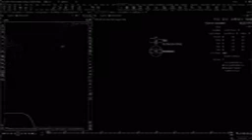So the first thing that we want to do is to examine the mesh structure. And you see, this is a typical output of the Marching Cubes algorithm. And as 3D Coat is a voxel sculpture, this is what is to be expected. But we cannot work with that, because the dual graph of this mesh here will just be a mess. So how can we transform this surface into something that resembles, at least visually, a Delaunay triangulation?

Well, we have this very nice remesh node inside of Houdini. Let's append this remesh node and let's wait a second to generate the output. Remeshing is quite a time-consuming operation, and you see this is already a lot better. But still, the triangles are not looking very even, and some of them are very thin, so this is not optimal. We can enhance the output if we just up the iterations.

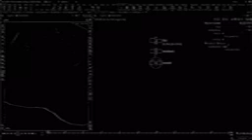So let's say, do 5 iterations for us. If we do that, the mesh quality that is created by the remesh node will be a lot better. But at the same time, the triangles will get a lot bigger. So let's decrease the target edge length to something like 0.05 and wait again.

And now this is something that looks workable. You see that the triangles pretty much are equally sized, and the inner angles of the triangles are pretty similar, which gives pretty triangles. So let's work with something like this. Although it's a good thing to have equally sized triangles, I want different triangle sizes for aesthetical reasons.

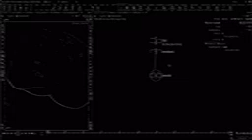So the good thing is that the remesh node has 2 operation modes, fixed length and adaptive. And what adaptive allows you to do is to set an attribute to define the output size of the triangles. And you have to set this attribute before the remesh, of course, on the old mesh. So let's do that. Let's append a VOP, a point VOP. And in here we want to use noise to create an attribute.

So it's the old procedure. Put down an anti-alias noise. You know by now that I prefer that one due to execution speed. And then immediately after that, append a fit range, because you have to fit the output of the anti-alias noise, minus 0.5 to 0.5, to 0 to 1, to transform it into a workable range.

Now that we have that, we can use our good old ramp parameter to remap the noise, like so, and it will be a float ramp because this is a float parameter. And then a second fit node, fit range, because the values that come out here are in the range of 0 to 1, and we want to set them to the destination values that we want to use to drive the final polygon size. So promote dest min and dest max, and let's create a bind export.

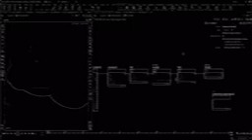And by looking into the help card of the remesh node, you can find out that the attribute to drive the polygon size is called target mesh size, like so. To visualize what we are doing, for now, just connect this to Cd, and you see that you see nothing, and that is due to the fact, as always, that this ramp defaults to 0.

So if we go up here with that, and then move these knobs closer together, we create some sort of noise. Maybe let's dive inside again and promote the frequency parameter of the noise to have more control over the look of it. Maybe something like this. So this is 1 and this is 0. But on the remesh node we use the value of 0.05, so chances are that we want to use something along these lines for the output of our attribute.

So let's try 0.1 and 0.5, like so. And go to the remesh node. Again, it takes some time to generate the output. But you see nothing has changed, and that is because we did not switch to adaptive yet. As soon as I do that, it's now taking this attribute into account. But at the moment you see not much, and that is because the values are not set correctly. You have to fiddle with the values a little bit to find something that works.

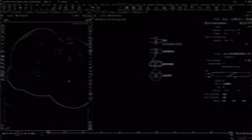So let's go a lot smaller on this one and see if that helps. Oh, and it does. Look at this. Now you have large triangles in the areas where the value is high, and small triangles in the areas where the value is small. Let me get rid of this color visualization, because then we can see the result better. Oh, okay, this is nice. But for my taste, the small triangles are too small and the big ones are too big. So what about changing the values again?

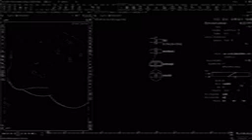Before I do that, I go to this drop-down menu here and go to manual update, because I want to change both values at the same time and I don't want to wait for the remesh node to update. So let's go to 5 here and to 0.2 on this one, and then set this to auto update again. And this already looks a lot more like it. Maybe let's go even smaller with this value. Yeah, that is nice. I like that. Now we have a lot of triangles, and some of them are big and some of them are small. Looks visually more interesting than having all triangles the same size.

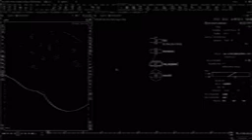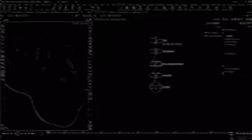Before we move on to the next step, call this set target mesh size, such that you can remember what this did if you open the setup in a year or so. So now for the magic. The good thing is that Houdini comes with an operator built-in that creates a dual graph for you, and that is the divide SOP. So append a divide SOP. And this divide SOP does not do much. Normally it's used to divide the geometry up, but down here you find this checkbox that states compute dual, and if you check that, boom, you have this nice Voronoi honeycomb structure. And I think this in its own right is looking very, very nice.

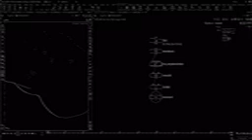But we want to go further. We want to break the surface, but not everywhere. We want to extrude it, but we want to create breaks that form interesting structures. And I decided to use the curvature to drive these breaks. So let's measure some curvature. For this we use a measure SOP. And this SOP analyzes the mesh and creates attributes that store information about the mesh. And one of these attributes is curvature. So as soon as I create this, I get on the geometry spreadsheet a new attribute called curvature.

And this curvature, it lies in the range between 0 and 1000. And it's a good thing that it is spread like this, because curvature is a tricky beast, and this guarantees enough resolution for the curvature.

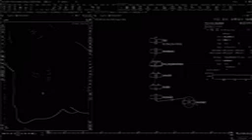To see what we created, let's append a visualize quickly, and let's say, please visualize curvature, attribute, ramped attribute, and if you go to infrared, now you see that it computes the curvature. And it does so on the points. And that is not too useful to us, because we want to split the edges apart where the curvature is over a certain threshold.

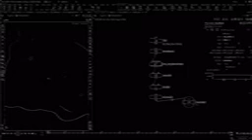So what we want to do is areas where the curvature is low should stay together when we extrude the thing, and areas with high curvature should break apart. So we need curvature, but we need it on the primitives. Nothing easier than that. Just promote the attribute. With attribute promote, let's call this curvature to prims, like so. So the attribute we want to promote is curvature, and we want to move it from points to primitives with the method average.

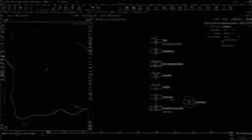And if we now append this visualize here and switch it to primitive, we see that we now have faces that are filled with one solid color, because this color is the average of the curvature of the underlying points, or of the points that make up the primitives.

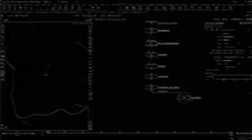A lot better. Now we can say, please Houdini, look at the edges. If the curvature varies more than a certain threshold along this edge, then break the edge. And we can achieve this with a node called vertex split. Vertex split examines a vertex attribute, and if the attribute varies more than this tolerance here, it splits the vertices apart. Very handy. But it cannot work with primitive attributes. It needs vertex attributes. So another attribute promote is needed.

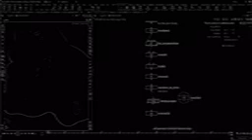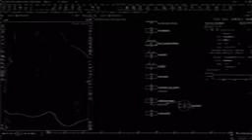Attribute promote. And from here, we promote the information down to the vertices. So from primitive to vertices, and the attribute is curvature. And let's visualize the result of this again by using vertex here. And you see nothing has changed, because if I turn on vertices, you see that every primitive has unique vertices for every point, and it just passes on the value it had before as a primitive attribute to all its vertices. So visually, nothing has changed.

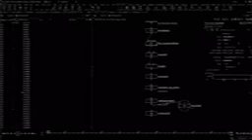Technically, a lot has changed, because the attribute now is on the vertices. Here we have the curvature. And that means that we can now use vertex split. So let's do that. Let's append vertex split here, make it active, and the attribute we want to use to split by is curvature. And you see, if I turn off wireframe, everything got split immediately.

That's because the tolerance is very low, and if I go higher with a tolerance, maybe above 1, you see these front breaks, these are the edges that are split by vertex split, where it just uniques the points. Very cool. Maybe stay at 2.1 for now.

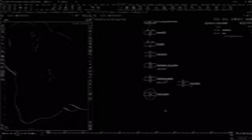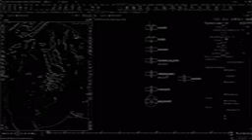So now, the last step is to extrude this. So append a polyextrude, and just extrude everything outwards along the normal. Just a very tiny little bit, like so. Yeah, 0.02 will do for now. And you see, the vertex split created very intricate patterns here due to this threshold.

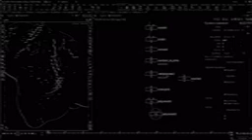Now let's append a second polyextrude. And this time I only want to extrude the areas that got already extruded, because I plan to throw everything into a subdivision surface, and to have the caps very sharp, I need another edge loop here. At the moment I have only one extrusion.

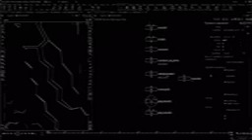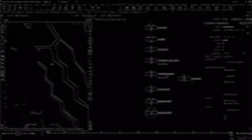So I can achieve this by putting out a front group called extrude front, and then limiting the second polyextrude to this group. And you see, now it's just extruding what it already extruded before. And let's just extrude a second time a very, very tiny amount, maybe even less than that, like so. You see, now we have just this shaping loop here at the outer front. Very good. And now finally append a subdivide.

Oh, and don't forget to name this node curvature to vertices, with a T here. And now finally a subdivide. Catmull Clark will do. Give it a depth of 2.

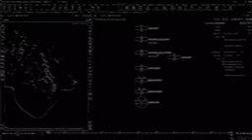Get rid of the wire display, and you see now these very coral-like, very organic shapes emerge, because these cracks are defined by the curvature of the underlying surface. And by playing with this threshold parameter, let's say go down to 1.8, you can create more cracks. So it's totally up to you how many cracks you want to create.

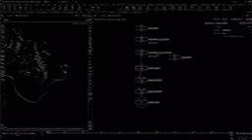Let's say we stay at 1.2 here, and this looks nice. Now we have large areas without any cracks, where the curvature doesn't vary very much. And then we have these areas here, where we have nice coral-looking structures.

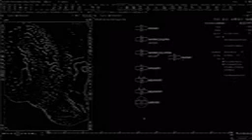So let's append a final null and call this out sculpture. Sculpture, like so, and set the display and render flags and go up one level. Nice. Now we have that.

As we created this object using curvature, it might be a good idea to shade it using curvature. So let me quickly create a Redshift setup to render this. To be able to see something, I need first some lights, and I need a Redshift node. So go to the Redshift shelf and click on this Redshift button here, and this creates a Redshift ROP with the render settings. Back to OBJ, and now we need a camera, like so.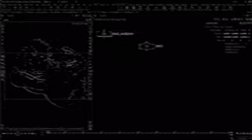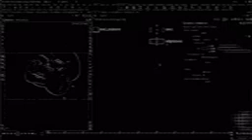Camera 1. I usually color this red to indicate that this is a Redshift camera. And now we want to create a RS dome light that is red in my scenes too. And this will just be something blue-grayish for now, like so. And then we need an RS light. And this RS light should be an area light, like so.

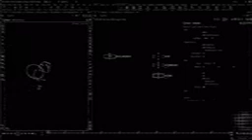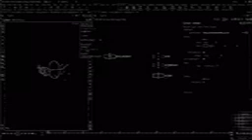So if I go out of this light, I can position it like so maybe, and then rotate it a little bit. Maybe like so. And this light comes with a default intensity of 100, which is far too much for most of the scenes. So switch to camera again. That might work. Great. So now let's do a quick IPR render to see if it works. And yes, this looks nice.

Great. So time to create some materials. Switch to the material context and create an RS material builder. Call this sculpture. And in my version of Redshift, which is an old version, I have to set this flag. Chances are, if you're using a newer version of Redshift, this is already set for you. Inside you find the material output, and we want to append our RS material and connect the output color of this material to the surface port.

And now let's create a curvature. This curvature here examines the surface curvature and shades it black to white. So append this to the diffuse color, like so. And now for the settings. Maybe let's up the samples to something bigger and then go down by a huge amount with this radius here, because in Houdini this is 1 unit, and these tiny little cracks we want to shade with curvature are really very small.

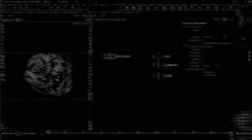And before we do an IPR rendering again, let's switch to OBJ again and apply this material. Here under the Render tab, under Material, we find this sculpture material. So now again IPR. And here you have the curvature, looking very nice and promoting the tiny crackle structures very beautifully.

Maybe let's find another angle for the camera. You can say always on top here for this window. Like for example so. And now if we go back to the material, we can create a ramp and just remap this curvature to something more colorful.

Important is that you switch the source from UV map to Alt, because then it uses the input color, and then you can do something that suits your taste, like maybe something like this, like so. And even if you move the knobs, you can remap this a little bit. Well, and that is the foundation of rendering this using a curvature-based shader.